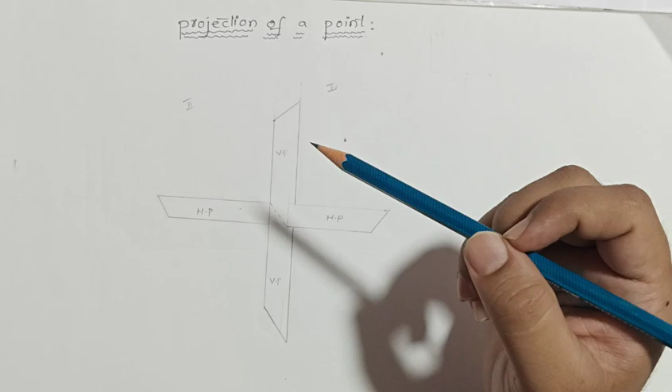Today in these sessions, we are going to discuss the most important topic. The name of the topic is projections of a point. Projections of a point is a method of representing the exact positions of a point in space on a reference plane, such as the horizontal plane and vertical plane.

Horizontal plane is known as the top view and the vertical plane is known as the front view. When we draw the image of a point on a plane surface to show where it is located, the image is called the projection of the point.

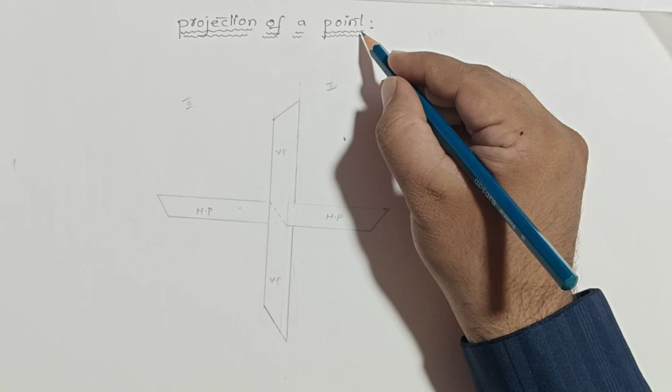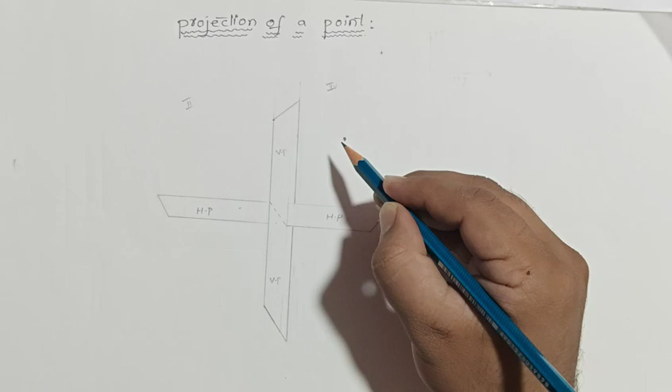Again, I will repeat. When we draw the image of a point on a plane surface to show its exact location, the image is called the projection of a point.

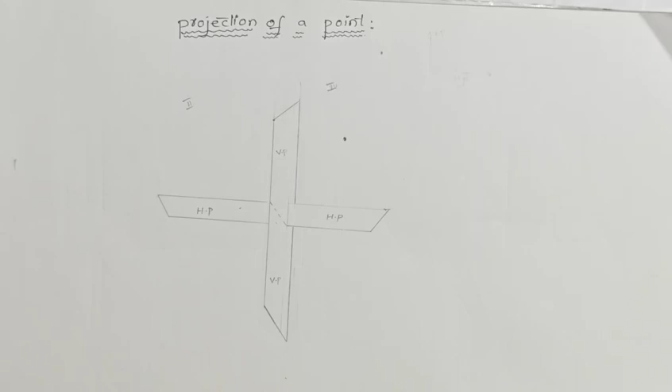First of all, we need to understand the concept of the quadrant system. Let us see. This horizontal line is called the horizontal plane and this vertical line is known as the vertical plane. Clear? In total we have 4 quadrants: first quadrant, second quadrant, third quadrant and fourth quadrant. We need to find out the exact position where the point lies.

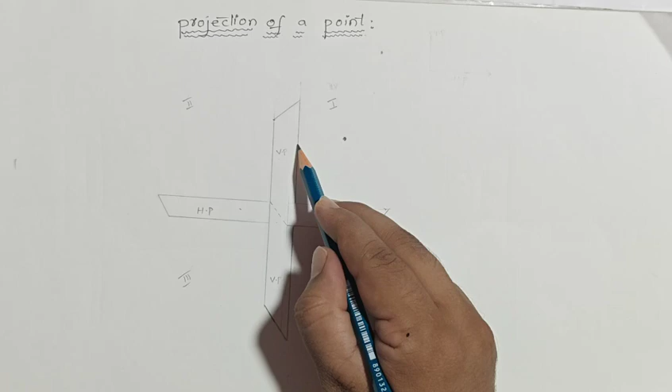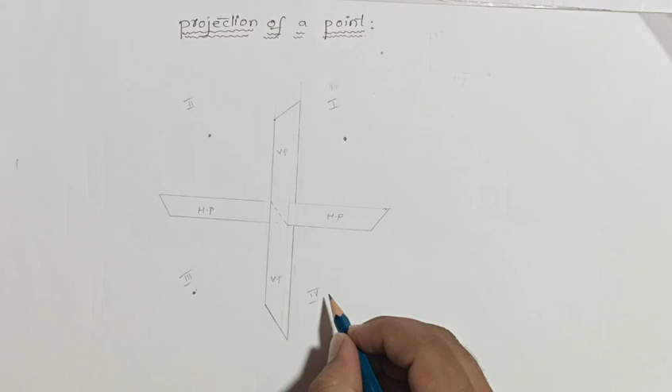So we can say that this point is above the horizontal plane and in front of the vertical plane. What about this point? This point is above the horizontal plane, behind the vertical plane. Come to this point. This point is below the horizontal plane and behind the vertical plane. What about this point? This point is below the horizontal plane and in front of the vertical plane.

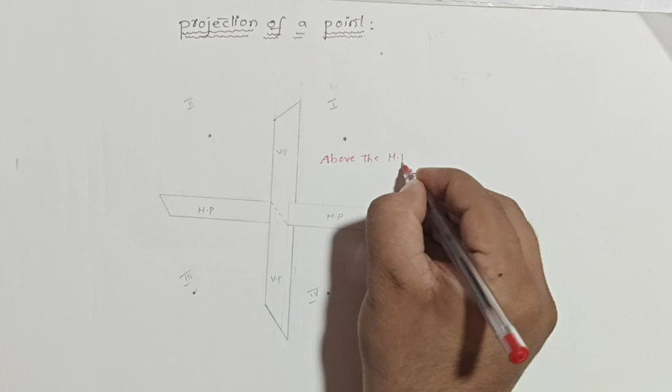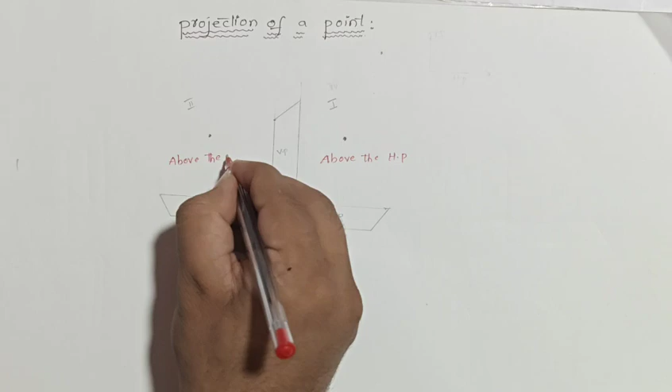So can we write like this? First quadrant, above the horizontal plane, and the second quadrant also above the horizontal plane. In the third quadrant, below the horizontal plane, and the fourth quadrant also below the horizontal plane.

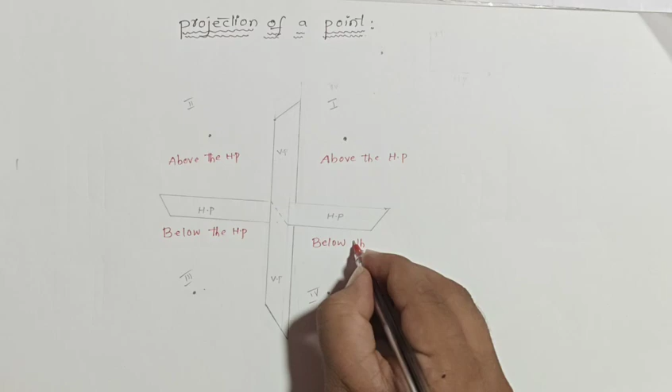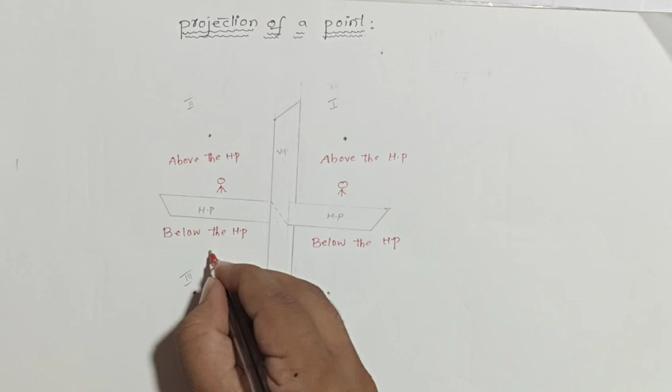Let us assume, I will give a simple example so you can understand very easily. These 4 persons lie in 4 different coordinates. You can say the first person is above the horizontal plane, and the second person also above the horizontal plane. What about the third and fourth? The third person and fourth person are below the horizontal plane. Do you agree or not? Yes.

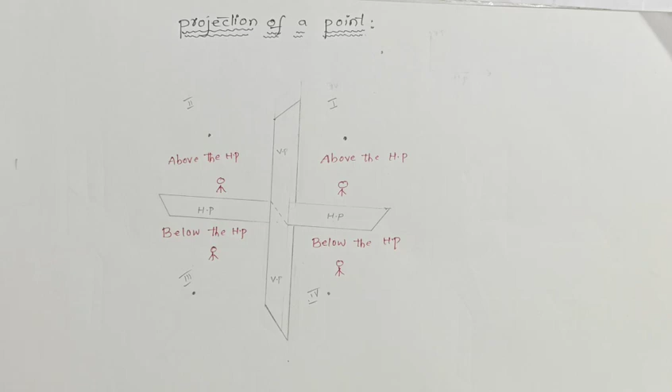After that, let us see. This first person is in front of whom? Vertical plane. What about this fourth person? This fourth person is also in front of the vertical plane. Can we write here, in front of the vertical plane? What about this fourth quadrant person? In front of the vertical plane.

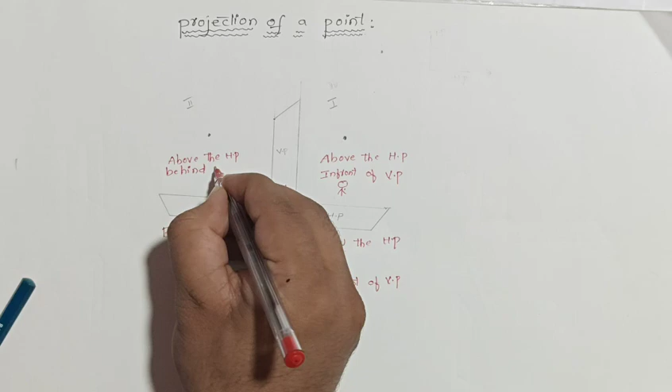What about the second coordinate person and third coordinate person? The second and third coordinate persons are both behind the vertical plane. So we can write behind the vertical plane, and the other person also behind the vertical plane.

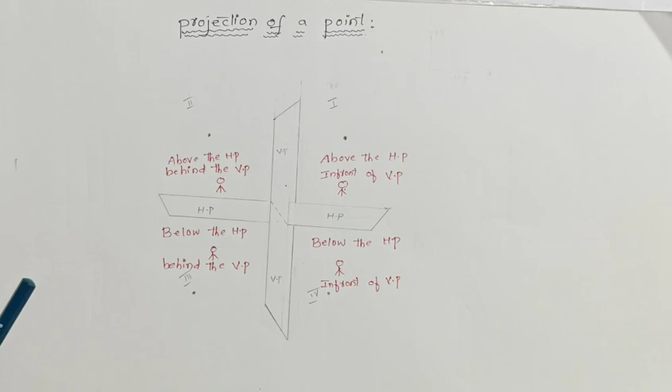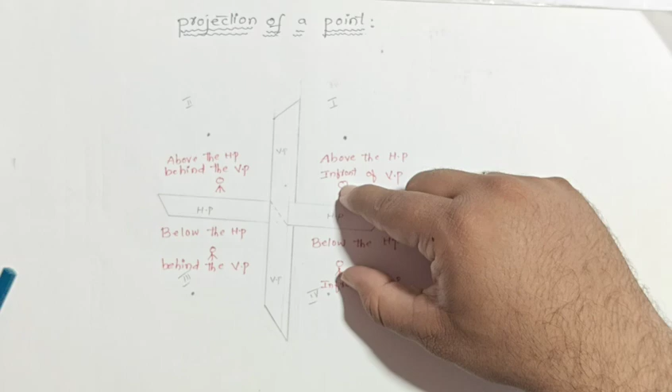Let us see how to understand the concept. The first person and second person are both above the horizontal plane. The third person and fourth person are below the horizontal plane. I hope no one has a doubt up to here. Again, the first person and fourth person are both in front of the vertical plane. The second person and third person are both behind the vertical plane.

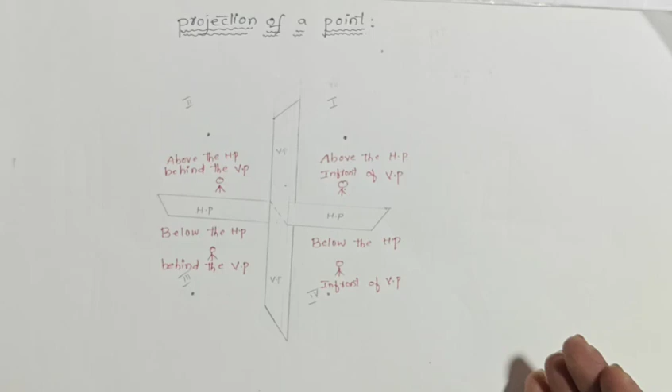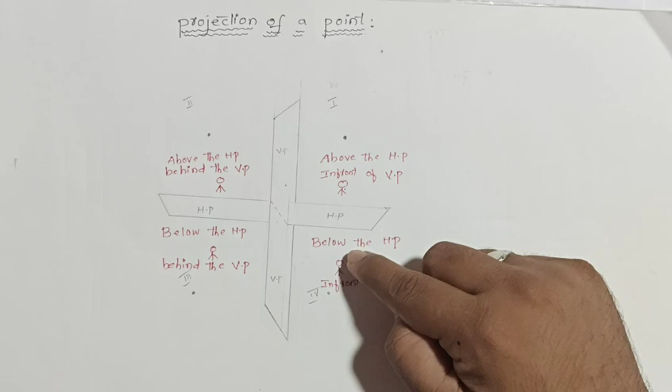So we understood the concept. The first person is above the horizontal plane and in front of the vertical plane. The second person is above the horizontal plane and behind the vertical plane. The third quadrant person is below the horizontal plane and behind the vertical plane. The fourth quadrant person is below the horizontal plane and in front of the vertical plane.

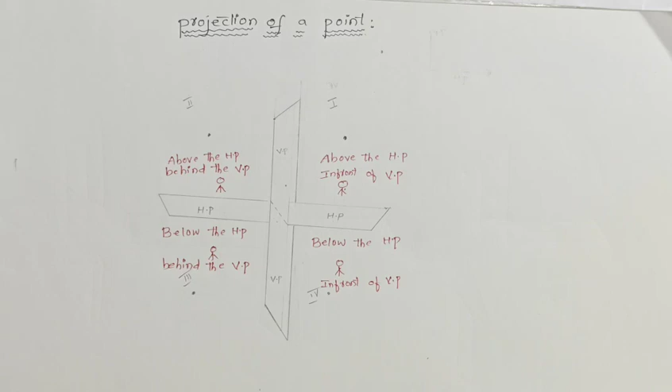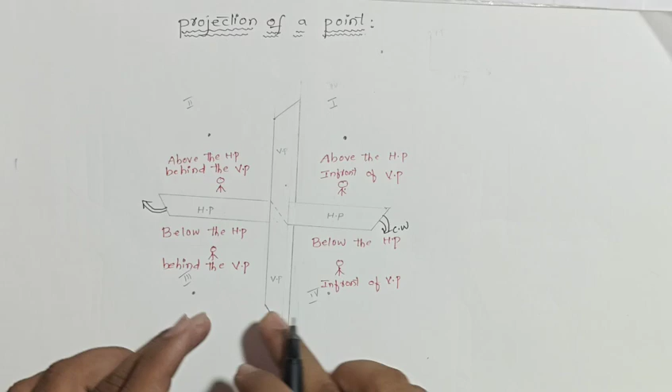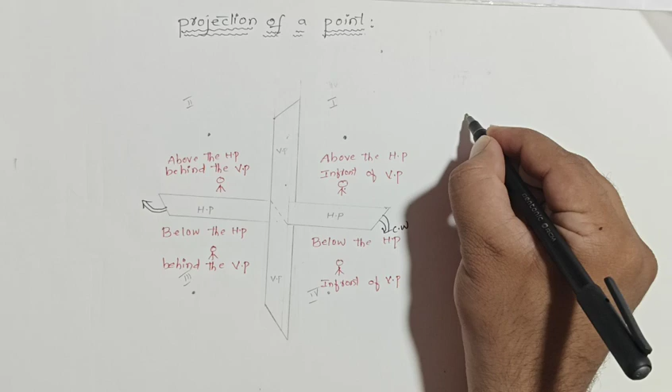Then you need to know very well that the vertical plane will not be rotated. Who will rotate here? The horizontal plane will rotate in the clockwise direction. So from this coordinate we will generate the coordinate formula. How to generate? Let us see. First is the vertical plane. This is our vertical plane.

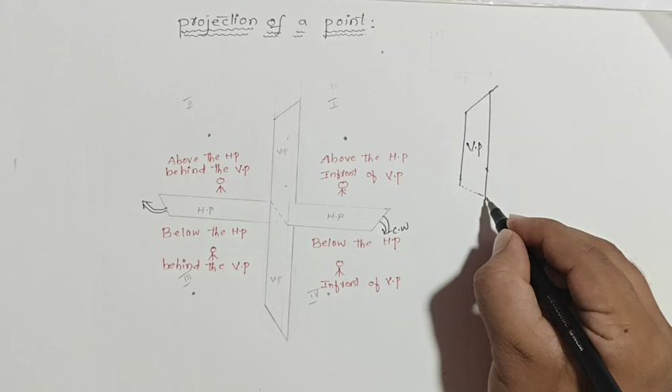Just a minute. Clear?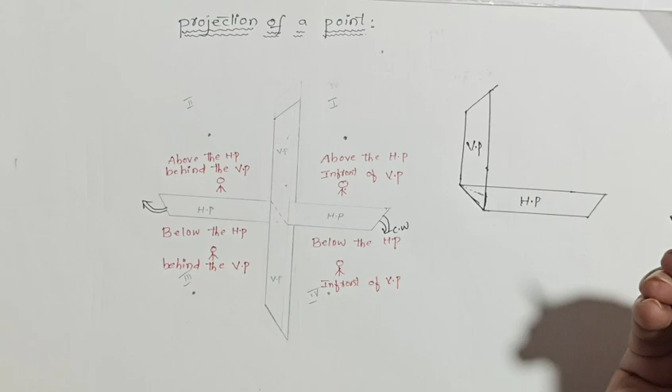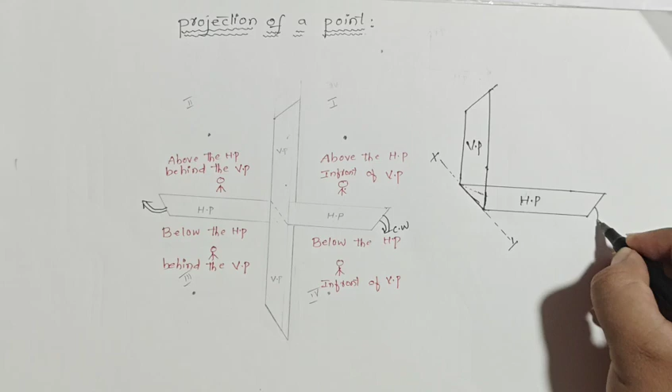So this is the horizontal plane, and this line is what we call a reference line. It is represented as X and Y. Just now I told you this horizontal plane will rotate in the clockwise direction. Then how do we generate this formula? The vertical plane is rigidly fixed.

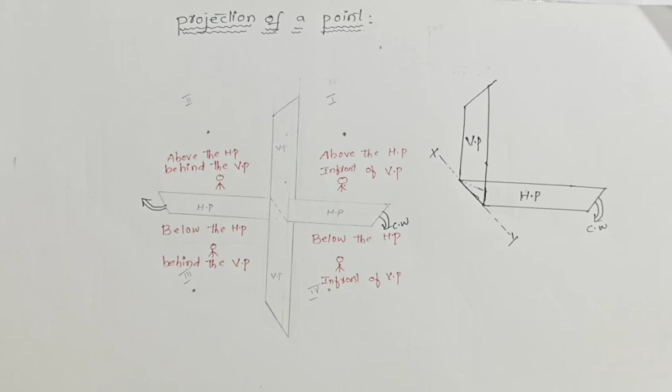First draw the reference line, X and Y. The VP remains the same. Who will rotate here? The horizontal plane will rotate in the clockwise direction. It should be below the reference line.

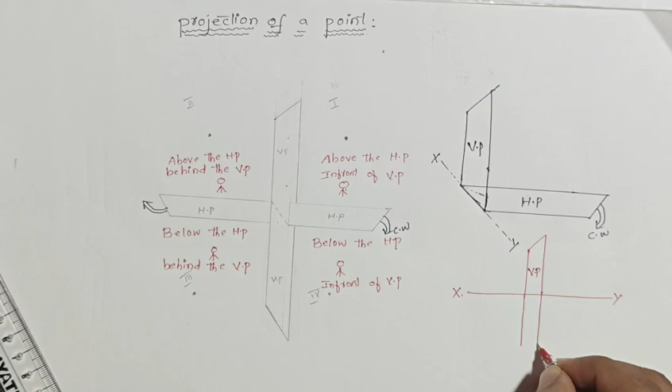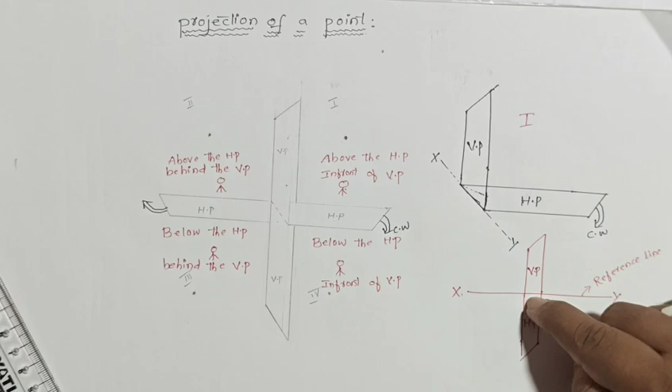This is the first quadrant formula. The vertical plane is rigidly fixed. The horizontal plane rotates in the clockwise direction, like this. So the first quadrant formula: X and Y is the reference line, VP is above the reference line, and HP is below the reference line. So we got the first quadrant formula.

What about the second quadrant formula? First draw the horizontal line and draw the vertical line. Let us see. First draw the horizontal line. Clear?

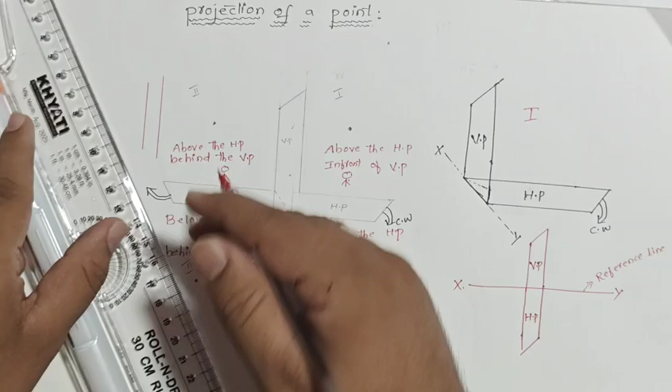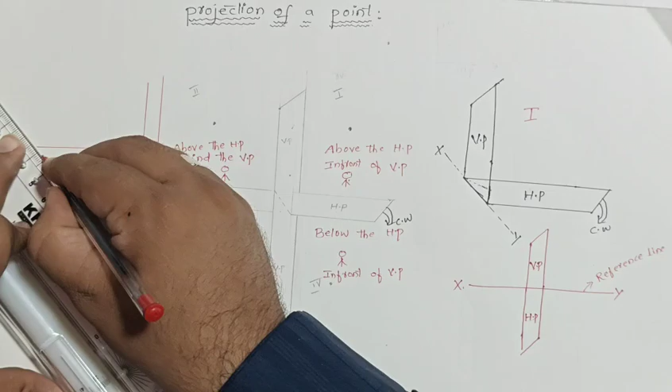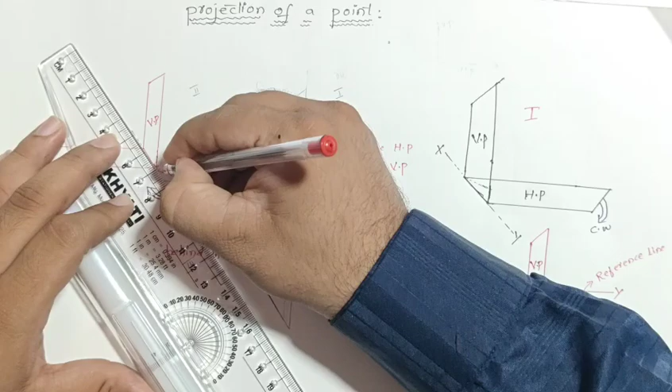Meanwhile, draw the horizontal line. So this horizontal line is called the horizontal plane. Clear? So this is what we can say here, horizontal plane and vertical plane. So we can write horizontal plane, and this one is the vertical plane. And this line is the reference line. It is represented as x and y.

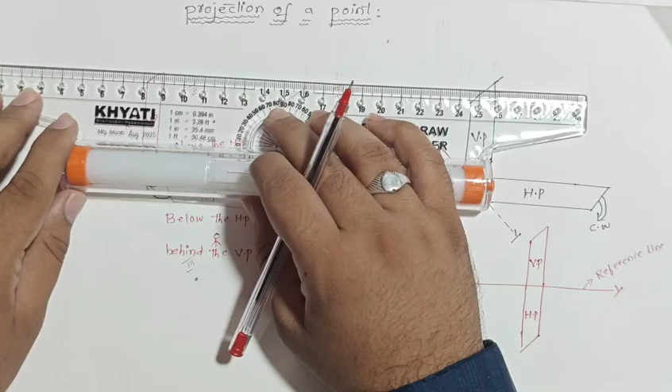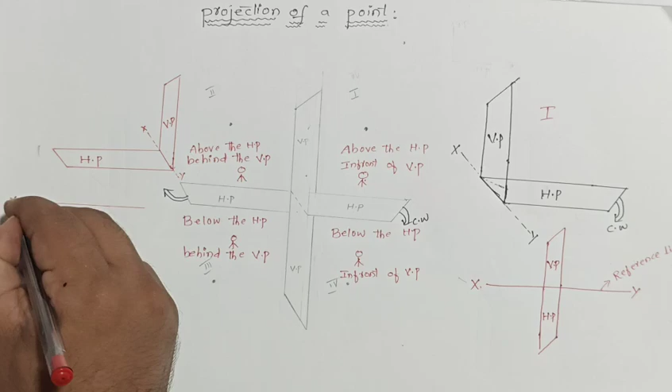So can we write the formula here? It is visible here. Okay. First draw the, so I will draw here above. First draw the reference line. So this is x and y. Just now I told you the horizontal plane will rotate in which direction? Clockwise direction. So HP and VP both are above the reference line.

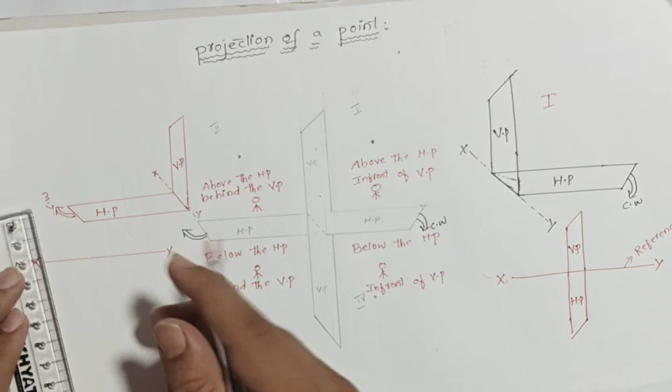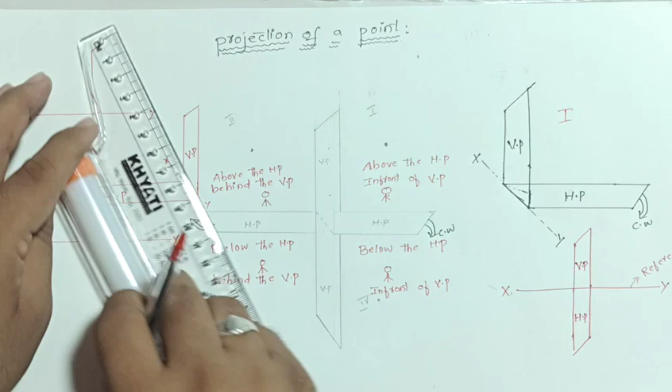So we can draw the figure. This is x and y. VP is rigidly fixed. The VP will not rotate, you know very well. Then this HP will collapse with the vertical plane. VP should be rigidly fixed. This HP will rotate in the clockwise direction. VP and HP both are above the reference line.

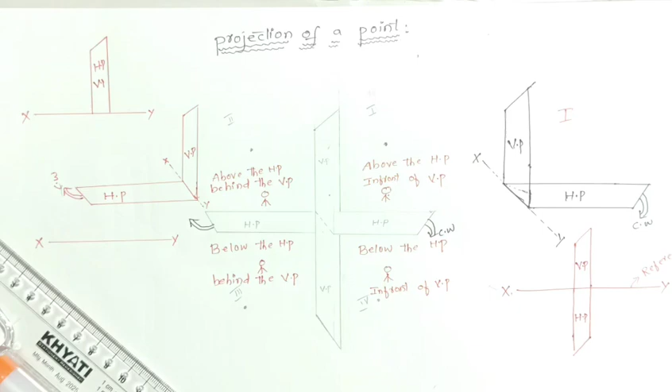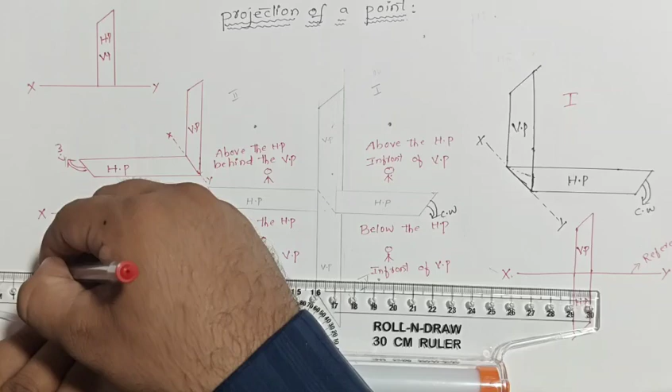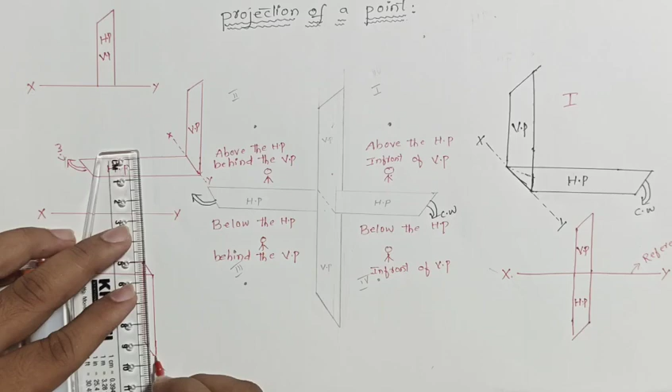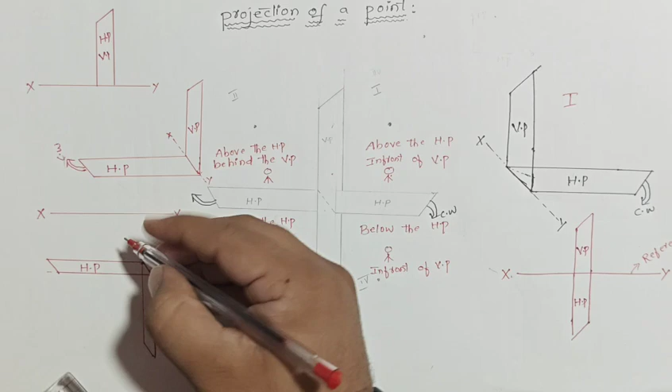Come to the point of the third quadrant. For the third quadrant, we want the horizontal plane and vertical plane. Draw the horizontal plane. Clear? So this is the horizontal plane and vertical plane. What about this line? This line indicates the reference line. It is represented as x and y. First draw the reference line x and y.

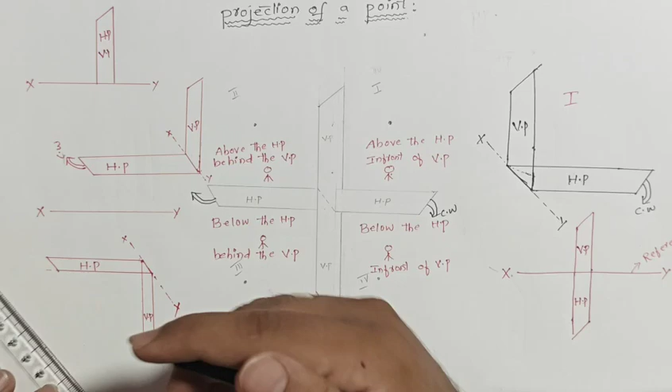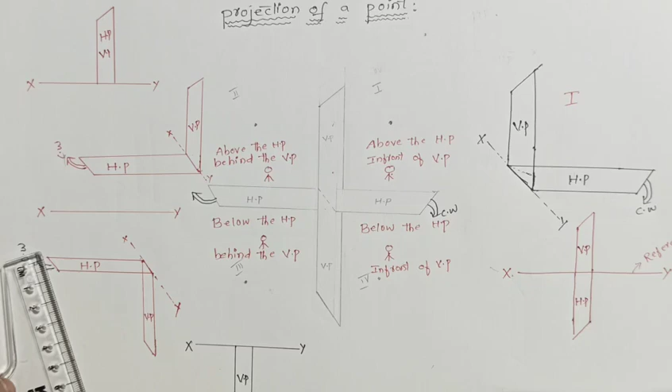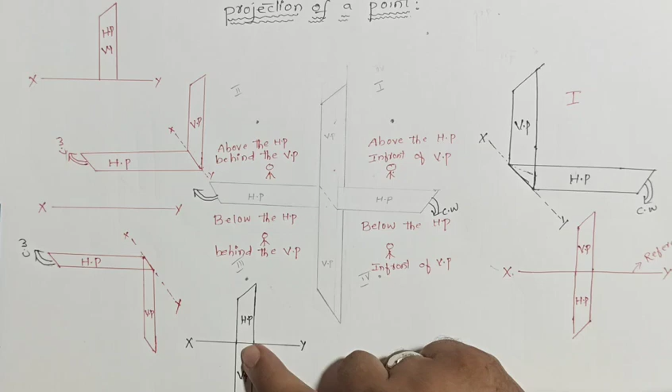Already I told you this HP will rotate in which direction? Clockwise direction. So we can say that this HP is above the reference line. The VP remains same. Who will rotate here in the third quadrant? HP will rotate in clockwise direction, like this. The HP should be above the reference line. The third quadrant formula is HP above the reference line, VP below the reference line.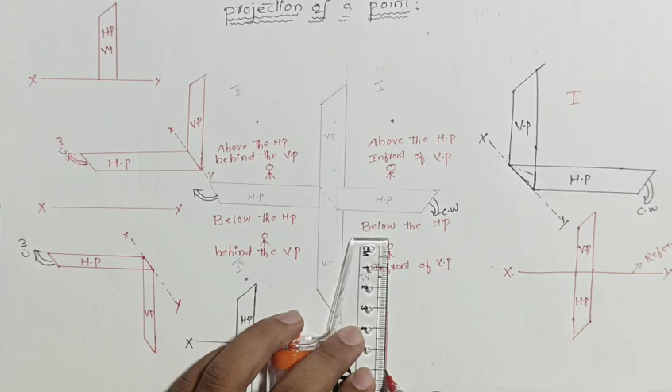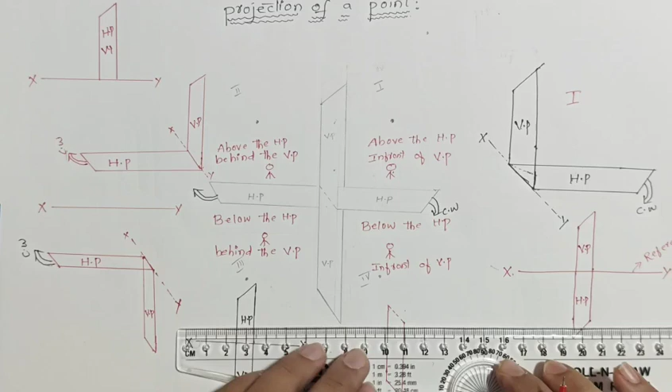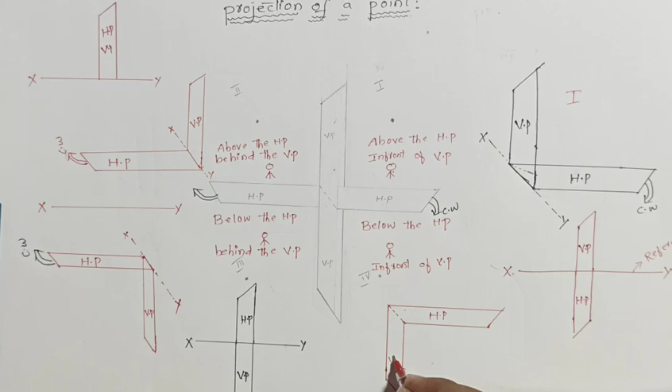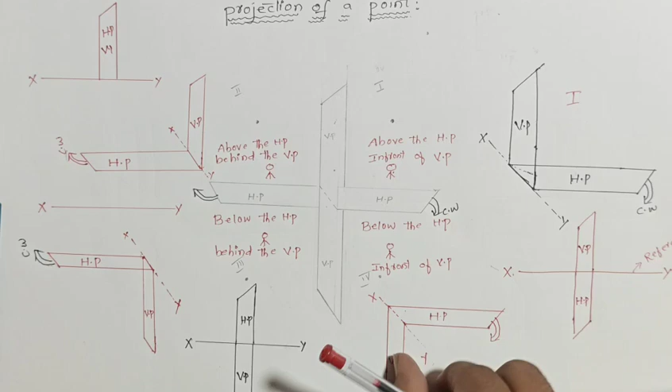What about the fourth quadrant formula? Let us see. First, draw the horizontal line and vertical line. This is HP, and this is VP. And this line is the reference line, represented as X and Y. Just now I told you the HP always rotates in the clockwise direction. If HP rotates clockwise, this means that HP and VP both are below the reference line. So we can draw like that.

First, draw the reference line. It's visible here, I hope so. X and Y. HP is below the reference line and VP is rigidly fixed over here. VP and HP both are below the reference line.

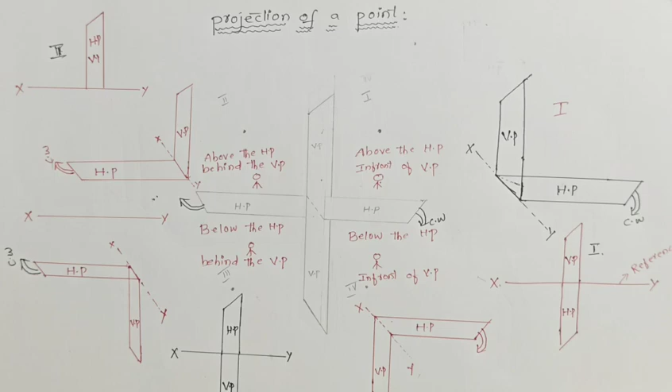Again, I will repeat the concept. In the first quadrant formula, we know that VP by HP. Second quadrant formula is HP and VP both are above the reference line. Third quadrant formula, HP is above the reference line and VP is below the reference line. What about the fourth quadrant formula? HP and VP both are below the reference line.

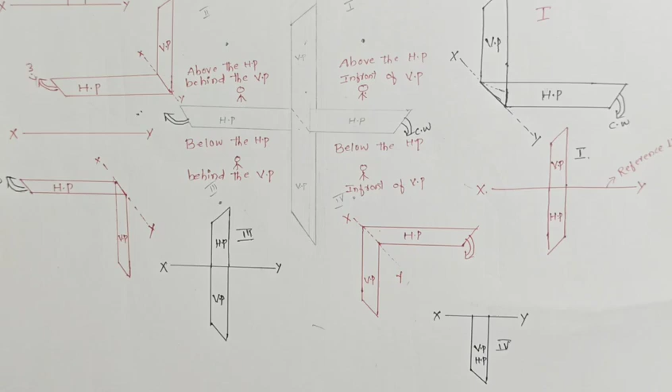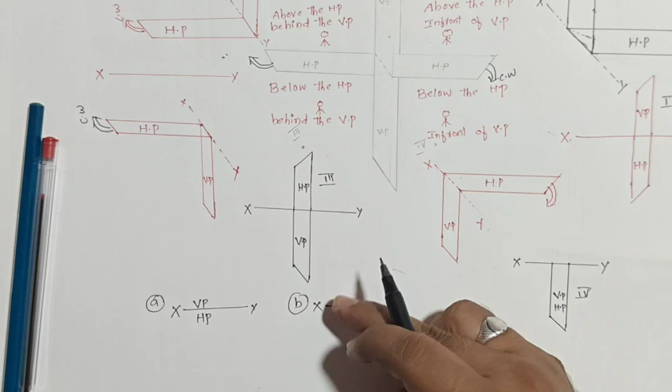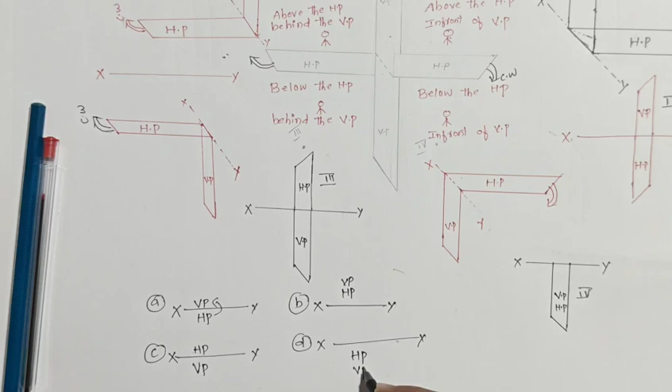So how to remember? I will give one more trick to remember the quadrant formulas. The first quadrant formula: first draw the reference line X and Y. VP should be above the reference line, HP below. In the second quadrant, draw the X and Y reference line; HP and VP both are above. In the third quadrant, HP should be above the reference line, VP below. In the fourth quadrant, HP and VP both are below the reference line.

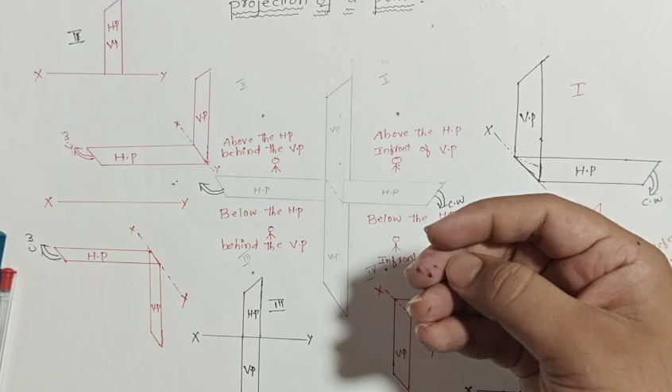So I will ask the question. Please identify which coordinate this question belongs to. For example, a point is 20 mm above the HP. Above means it lies in the first or second. A point is 20 mm above the HP, 60 mm in front of VP. Above and in front lies in the first quadrant. Again, I will change the question. A point is 20 mm above the HP and 30 mm behind the VP. This means it lies in the second coordinate.

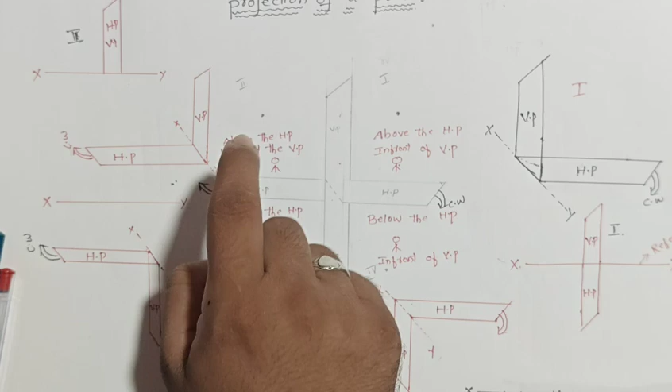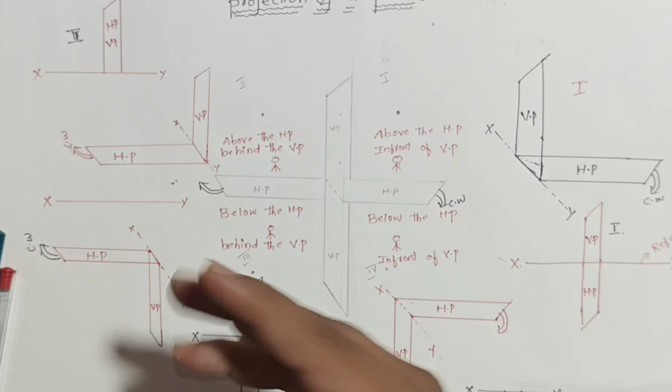Then a point is 40 mm below the HP and 60 mm behind the VP. Below and behind lies in the third coordinate. Then in the fourth coordinate, a point is 40 mm below the HP, 80 mm in front of VP. So it lies in the fourth coordinate. You know the concept of formulas of this coordinate system.

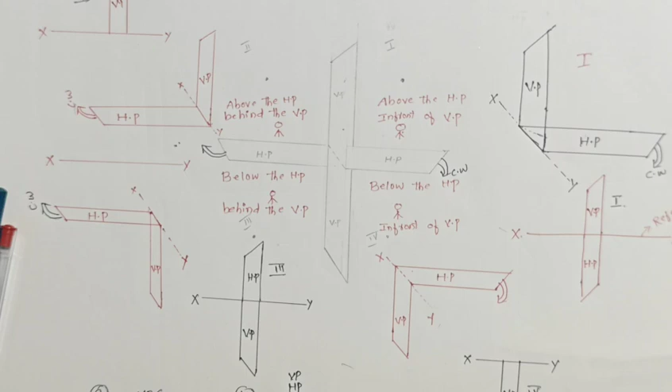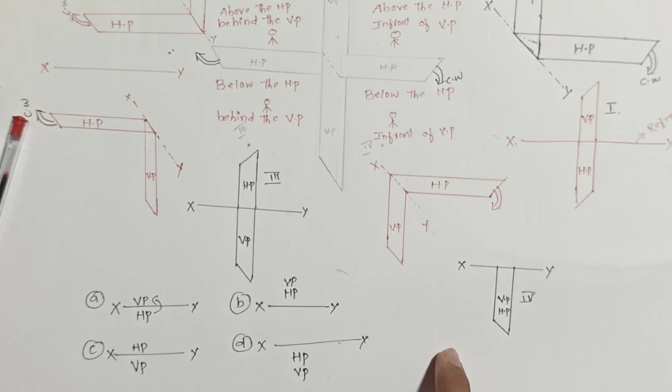The first quadrant formula is VP by HP. Second coordinate formula is HP and VP both are above the reference line. Third coordinate formula: HP should be above the reference line, VP should be below the reference line. That's it. Fourth coordinate formula: HP and VP both are below the reference line. And this line is the reference line.

In the next class, we are going to discuss problems on projection of a point.